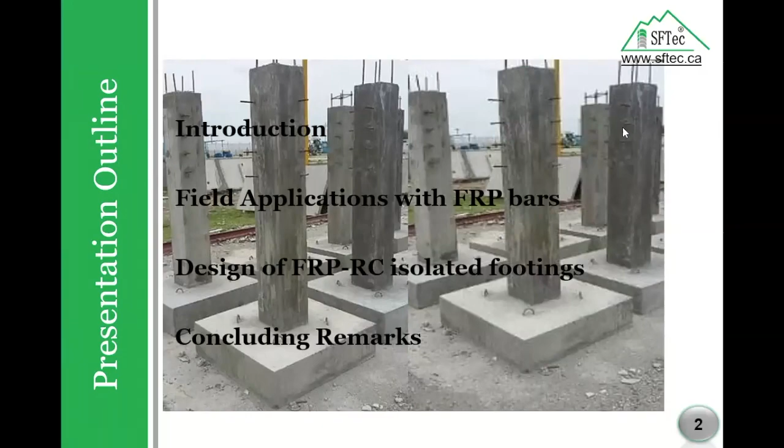Today we are going to talk about design of isolated footing subjected to eccentric loading using fiber reinforced polymer bars. In the next slides, I will go through a brief introduction, field applications with FRP bars, design of FRP-RC isolated footing, and finally, I will give some concluding remarks based on the presented slides.

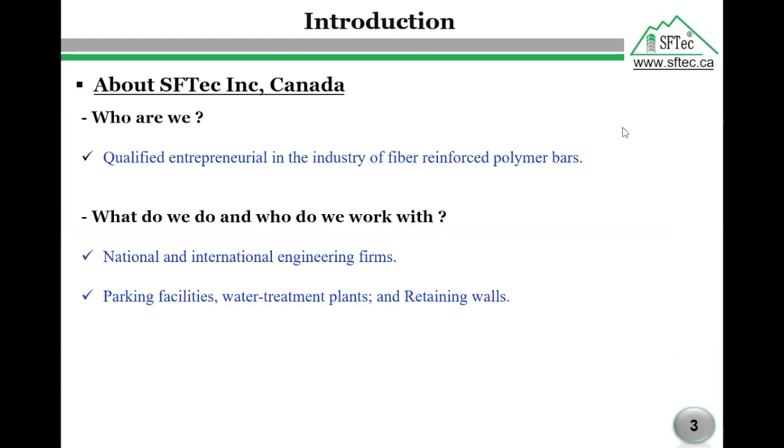In the beginning, I would like to introduce our company, SFTec. Who are we? SFTec is a professional entrepreneurial industry in the business of composite rebar. What do we do and who do we work with? SFTec is working closely with national and international engineering firms and government departments in the construction of parking facilities, water treatment plants, and retaining walls, as well as other structural elements.

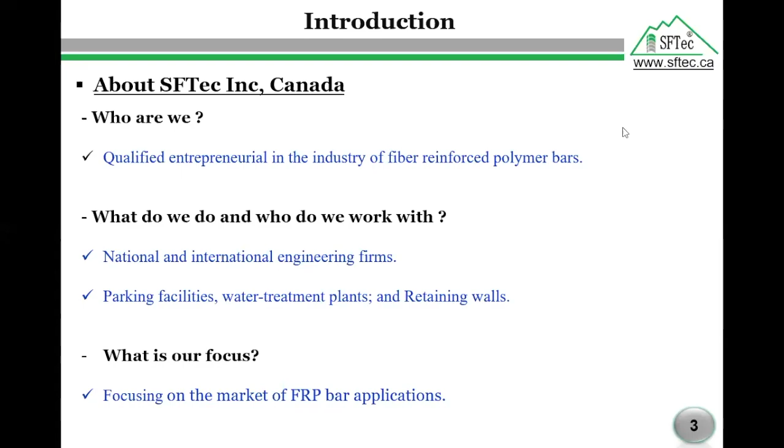What is our focus? SFTec is focusing on the market of FRP rebar application in North America and beyond, through providing a complete design for new structures reinforced with FRP bars, and conducting research and development strategies to ensure continuous improvement of SFTec products. The question now: what is the composition of FRP material?

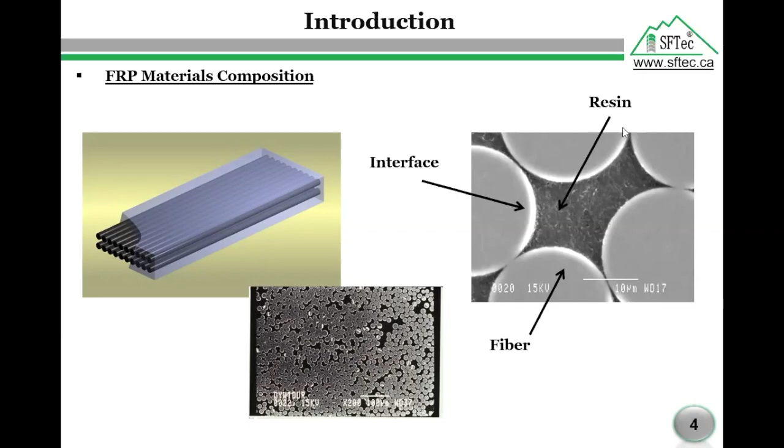As per the microscopic analysis on our right side, we see that the FRP materials consist of fibers, resin, and the interface between fiber and resin. FRP materials may be bars or sheets. We are using the bars as a creative solution to eliminate corrosion steel problems, while the FRP sheets are for strengthening and rehabilitation purposes. In our presentation, we will focus on FRP bars.

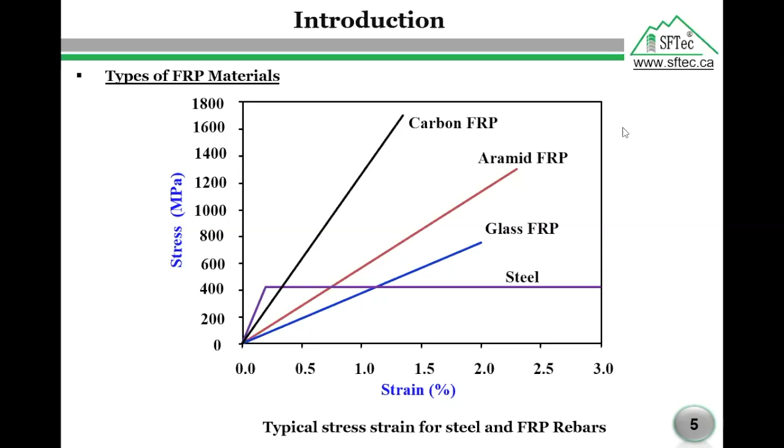SFTec products: in our company, we are mainly focusing on the production of GFRP materials in terms of straight bars, bent bars, closed loops, and spirals. We also have a GFRP material called GFRP connectors for sandwich panels.

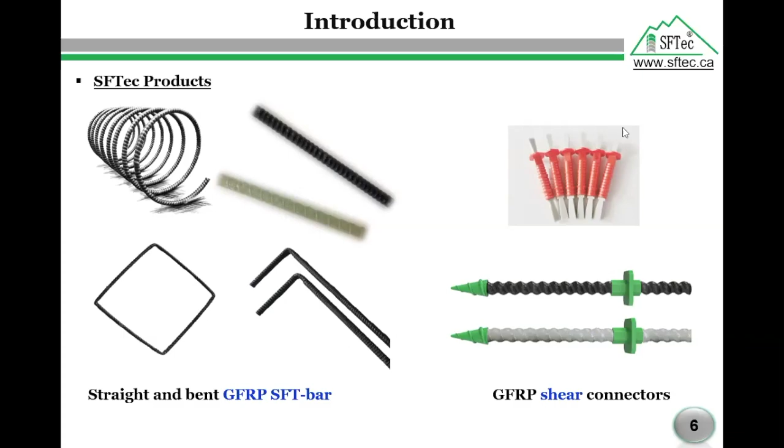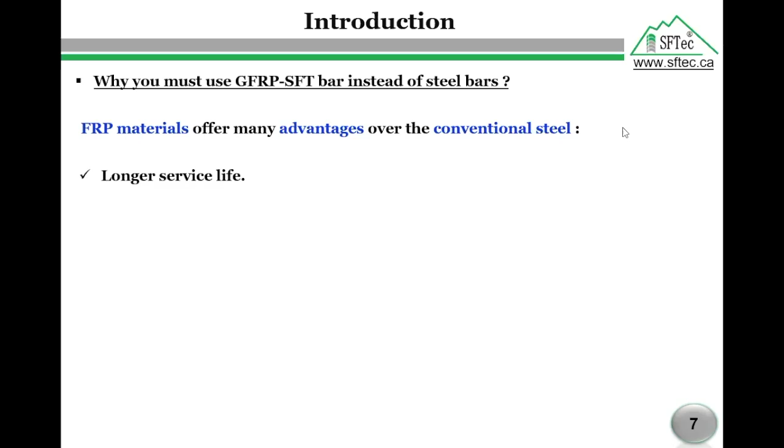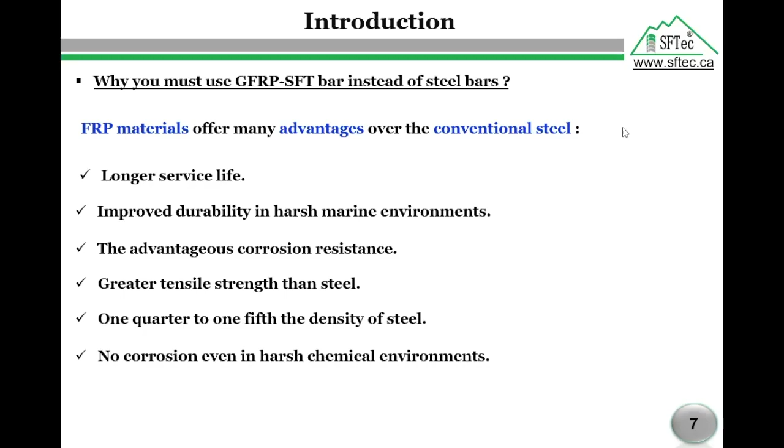Why must you use GFRP bar instead of steel bars? In the last 10 years, FRP bars have been used successfully in hundreds of bridges, parking lots, tanks, and marine structures across Canada and US. FRP materials offer many advantages over conventional steel bars, like longer service life, improved durability in harsh marine environments, the advantage of corrosion resistance, high tensile strength compared to the yield stress of steel, lighter than steel, no corrosion even in harsh chemical environments, and finally, neutrality to electrical and magnetic disturbance.

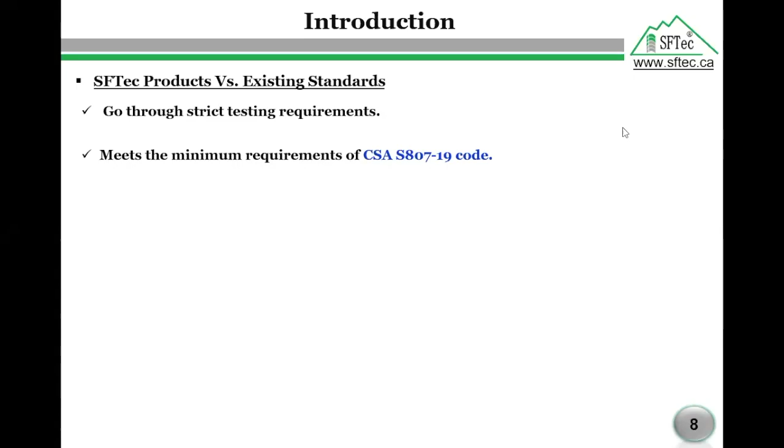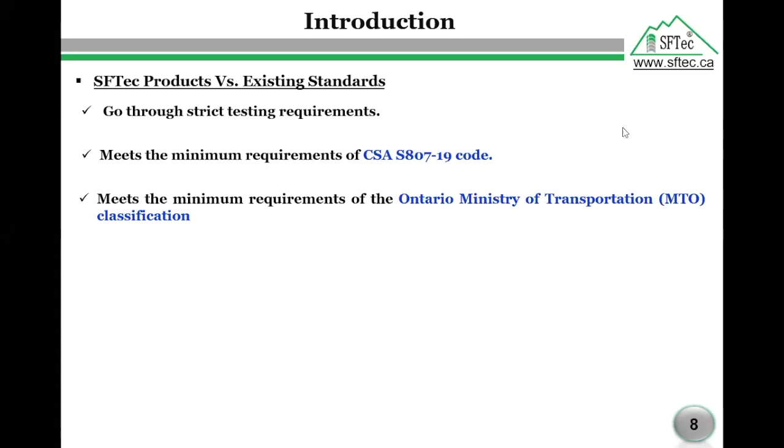SFTec products versus existing standards: our products go through strict testing requirements before they are approved for the market as cost-effective reinforcing materials instead of corrosive steel bars. Our rebar satisfies the minimum requirement of the specification for fiber reinforced polymer code CSA S807 for the year 2019. Also, our rebars meet the minimum requirement of the Ontario Ministry of Transportation classification to be considered for infrastructure works in Ontario province. The FRP testing includes three main categories: physical properties test, mechanical properties test, and durability test.

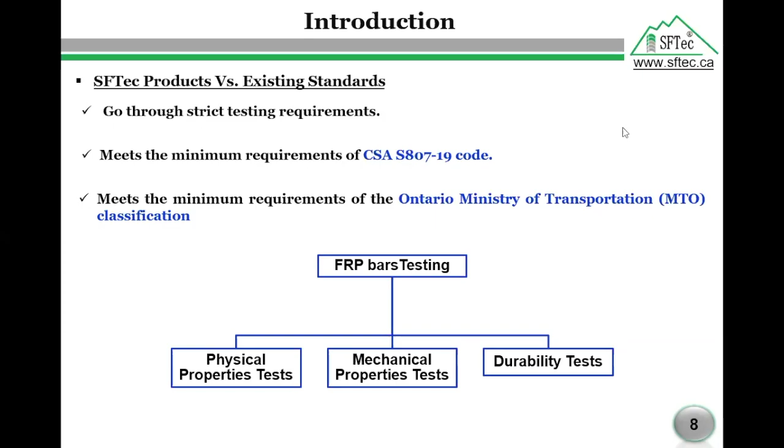As an example, I will give you detailed information on the mechanical requirements of the Canadian standard S807 and MTO versus SFT-bar, for the mechanical properties of GFRP bars of size number 6. Size number 6 here means 20 millimeter.

As we see in the first row, the tensile strength of SFT-bar exceeds the minimum requirement of Canadian standard S807 to the year 2019 and MTO by 60% on average. Also, as we see in the second row, the elastic modulus of SFT-bar exceeds the minimum requirement of CSA S807 and MTO by 8% on average. For other mechanical properties, our rebars also exceeded the minimum requirements of the Canadian standard S807 and MTO.

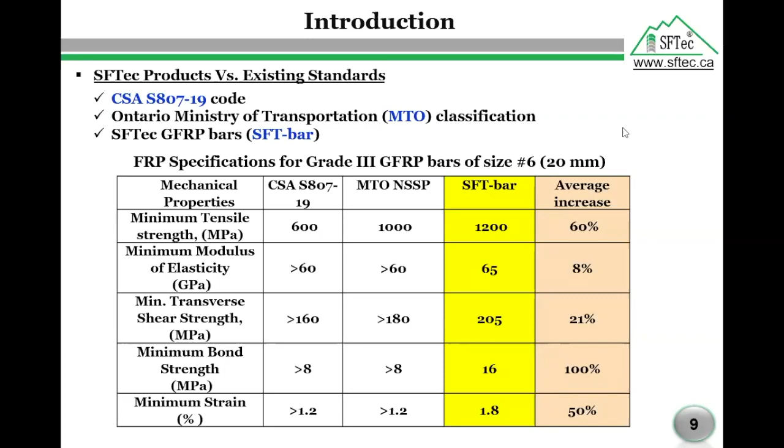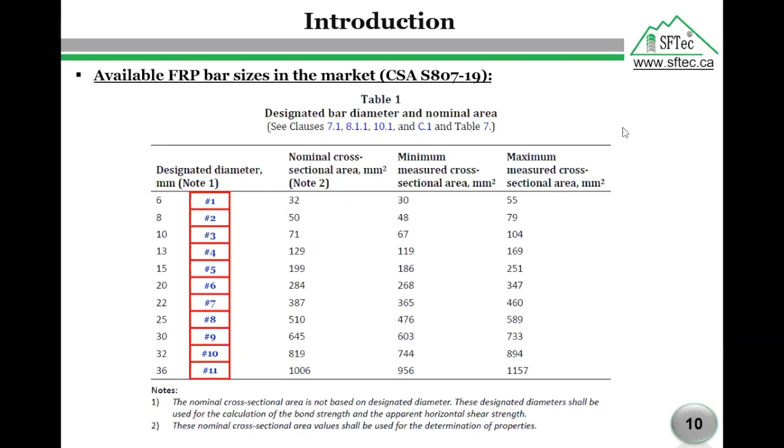Available FRP bars in the market. This table represents the available FRP sizes in the market as per the Canadian standard S807 to the year 2019. As we see, the available bar sizes range from 6 millimeter to 36 millimeter. Sometimes you will hear GFRP bar number 1 - this means a GFRP bar with 6 millimeter diameter, and so on, as shown in this red column.

Now I will talk about foundations. We generally hear about two different expressions related to foundation engineering: footing and foundation. So what is the difference? Foundation is the lower part of the building structure that transfers the building's gravity loads into the earth. Foundations are commonly separated into two categories: shallow foundations and deep foundations. Footing is a foundation that is constructed under the base of a wall or a column.

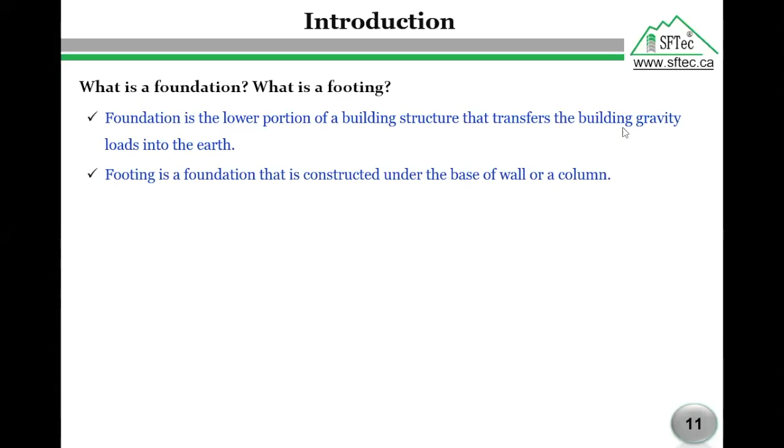The purpose of footing is to distribute the weight of the building over a large area. The term footing is generally used in conjunction with shallow foundations, not deep ones. Footing is placed directly below the lowest part of the structure it supports. What are the types of footing, or types of shallow foundations?

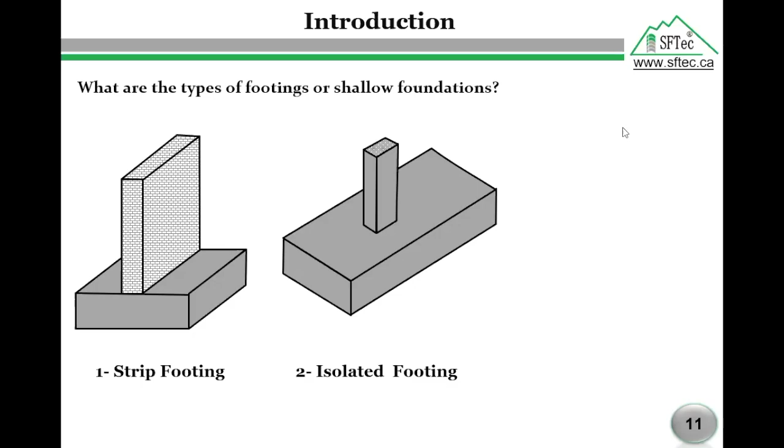Number two, isolated footing. Isolated footings are the most common type of foundation in ordinary structures. They are used to distribute column loads over a relatively large area of soil. As we see in this photo representing isolated footing, the transfer of load here will be in two directions, versus the strip footing where the loading is in one direction only.

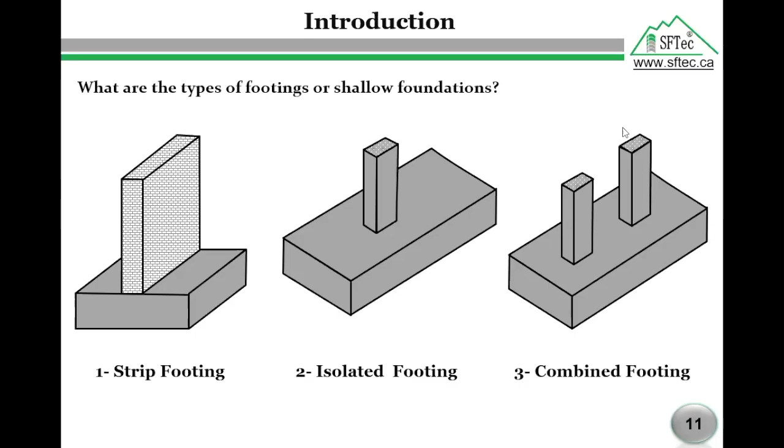The third type is called combined footing. If two columns or more are closely spaced, or the required footing sizes overlap each other, the footings are combined into one big footing called combined footing, as we see on our right side.

The fourth type is called strap footing. If one of the footings is very close to the property line, a stiff beam is used to connect the column to an interior column. This type is called strap footing, as we see here with two isolated footings connected by a beam - this beam is called the strap.

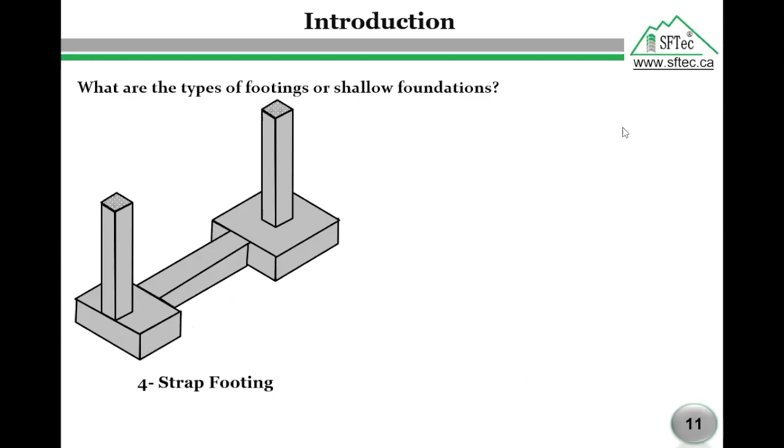The last type we have is called raft footing. If applied loads are heavy, or more than 60% of the isolated footings overlap, a raft foundation is used to support the entire structure, as we see here. This is similar to an inverted flat slab, containing column strips and middle strips.

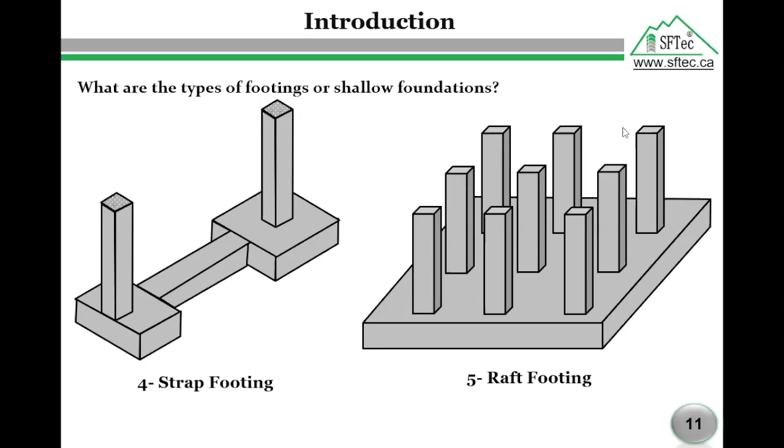Now I will talk about soil pressure under footing subjected to concentric loading. The actual bearing capacity differs significantly according to the type of soil, stiffness of footing, and loading conditions. In general, the distribution under the base of the footing is non-uniform, as shown in this sketch, which represents the distribution of stresses under a footing for sandy soil. Assuming the loading is concentric and the footing is rigid, the soil pressure is very high under one part, like a parabola, and very low on another part.

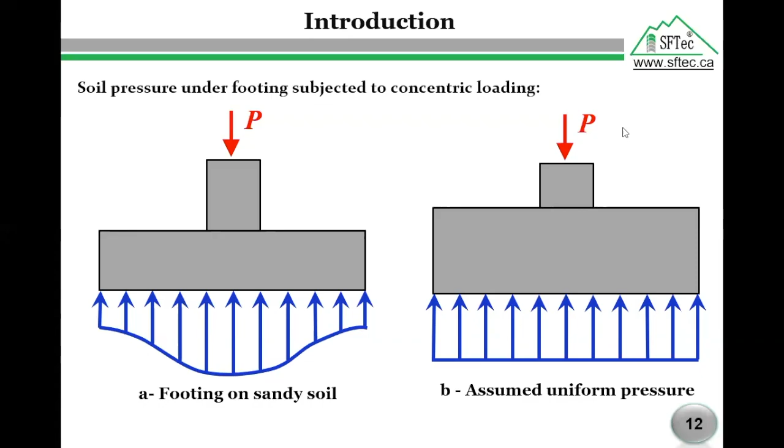However, for design purposes, the bearing soil distribution is assumed to be uniform, regardless of the type of soil or the stiffness of the footing, as shown on the right side. This assumption simplifies the calculation using the actual forces acting on the foundation, and speeds up the design process. So we have a footing subjected to a concentrated load called P. To calculate the area of this footing, we equate the actual stress to the allowable stress.

The allowable stress here is also called bearing capacity. We equate the bearing capacity of the soil to the actual stress on the soil. The actual stress is the column load we have over the footing area. We have the allowable stress from the soil reports and the column load from the analysis, so finally we can calculate the area of the footing.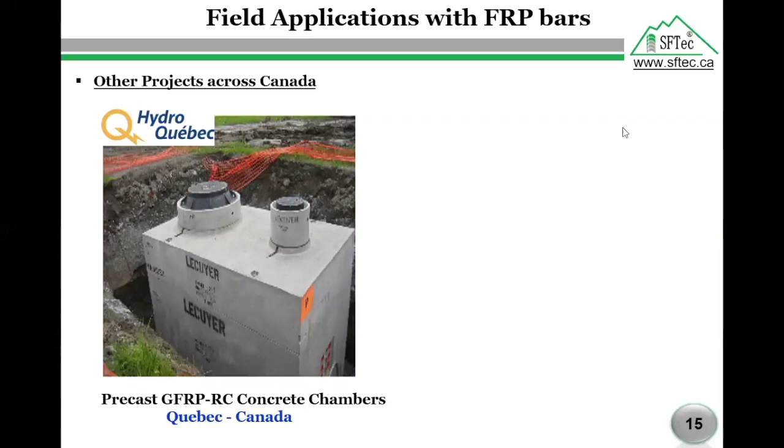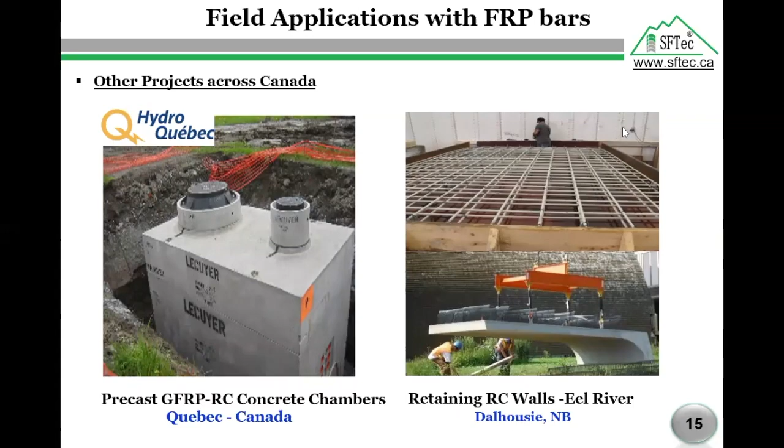Now I will shift to other different applications across Canada. The photo on the left represents a project with Hydro-Quebec for a precast GFRP concrete chamber. On the right, we can see another example of the preparation and installation of retaining RC walls for the Eel River Dalhousie. Another application is reconstructing the deteriorated one-way slabs in the Laurier-Taché parking garage using GFRP bars.

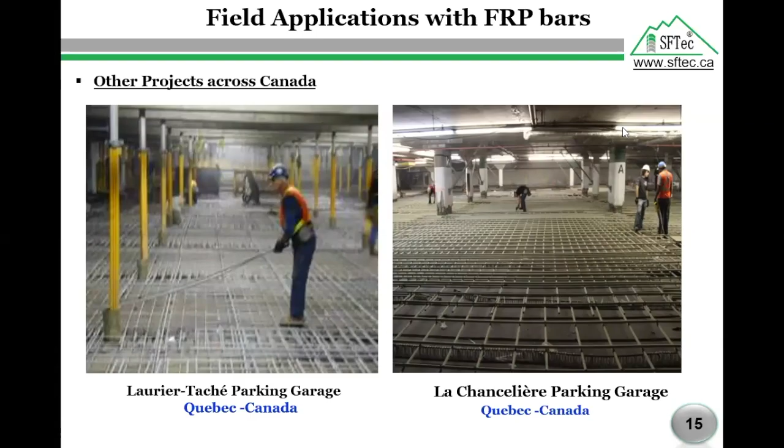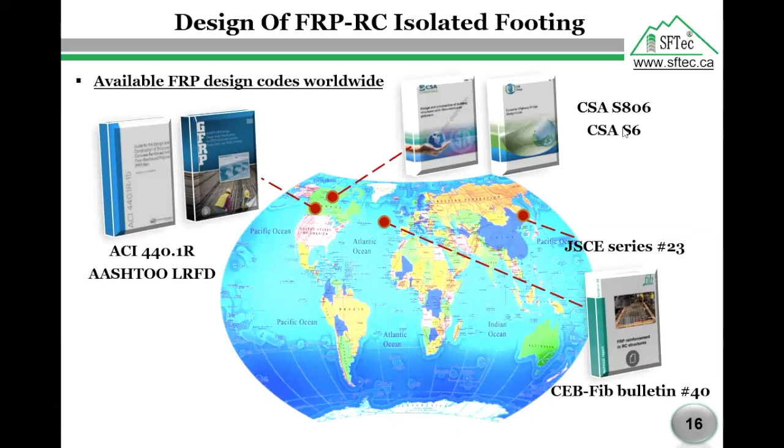The last field application today is the flat plate structure of La Chancelière parking garage in Quebec City. As shown on the right, the flooring slabs of this two-way parking garage are totally reinforced with GFRP bars. It is worth mentioning that several codes and guidelines are available around the world for design of structural elements reinforced with FRP bars - this covers the design philosophy of FRP-RC isolated footing.

Now I will move to the design philosophy for the isolated footing using GFRP bars. I will talk about the flexural and shear design of such footings, according to the Canadian standard S806 for the year 2012.

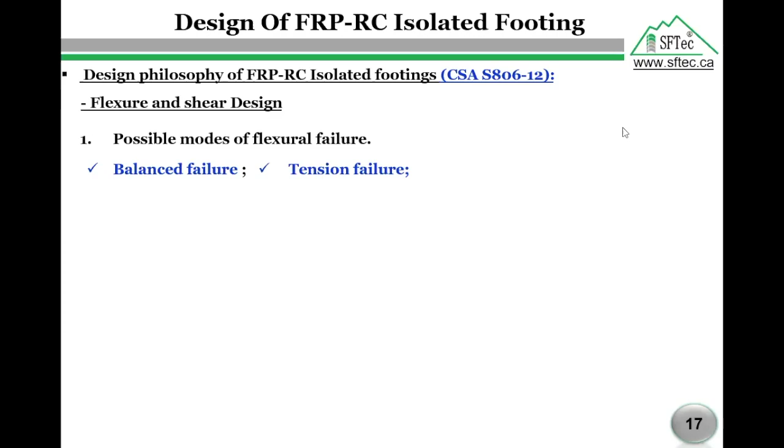We have three possible modes of failure of a concrete section reinforced with FRP bars. The first is balanced failure, representing simultaneous rupture of FRP bars and concrete crushing. The second is tension failure, representing rupture of FRP bars before concrete crushing. The last is compression failure, representing concrete crushing while the FRP bar remains in the elastic range, with a strain level smaller than the ultimate strain.

There is a design difference between steel and FRP, which is that FRP is linear up to failure and exhibits no ductility or yielding. Another major difference is that serviceability will be more of a design limitation in FRP reinforced members than with steel, due to lower modulus of elasticity - deflection and crack widths will govern the design.

Load factors and load combinations: according to the Canadian standard S806, the code uses the same load factors as in the Canadian standard A23.3 for the year 2014. Load combinations are also the same as in the Canadian standard A23.3 for the year 2014, which are based on the National Building Code of Canada.

Material resistance factor: concrete and steel resistance factors remain the same as in the Canadian standard A23.3 for the year 2014, while the FRP resistance factor equals 0.75 for all FRP structures, reinforced or pre-stressed.

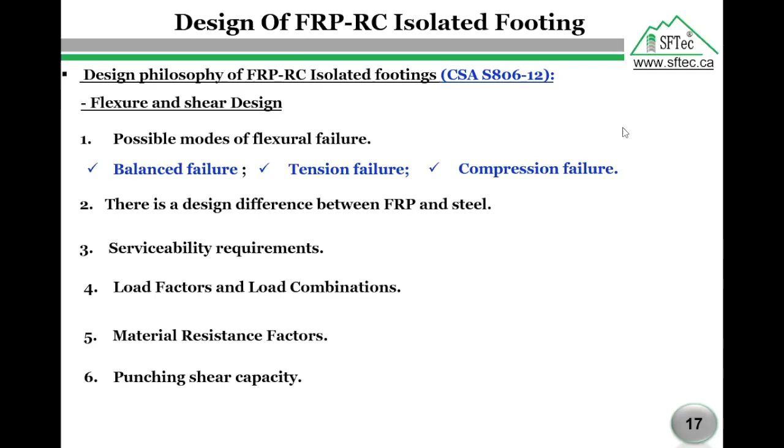The thickness of the isolated footing is commonly governed by the two-way punching shear. So the isolated footing should be checked against the two-way punching shear by comparing the actual shear stress from the acting load on the footing with the allowable punching shear stress using the available code equations.

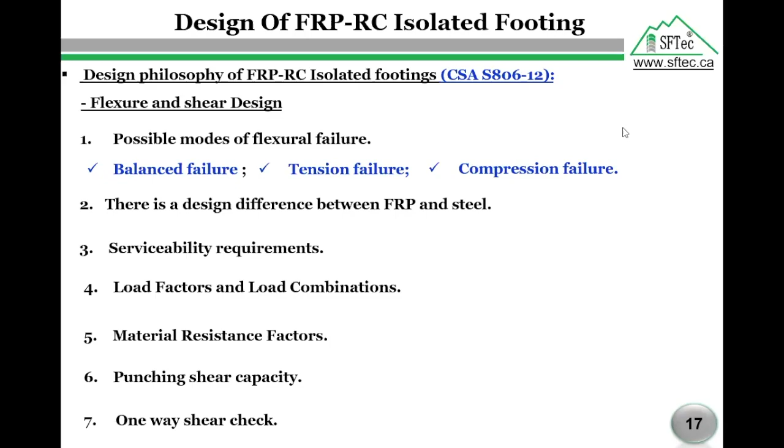The check of one-way shear is to be performed, even though it is infrequently critical.

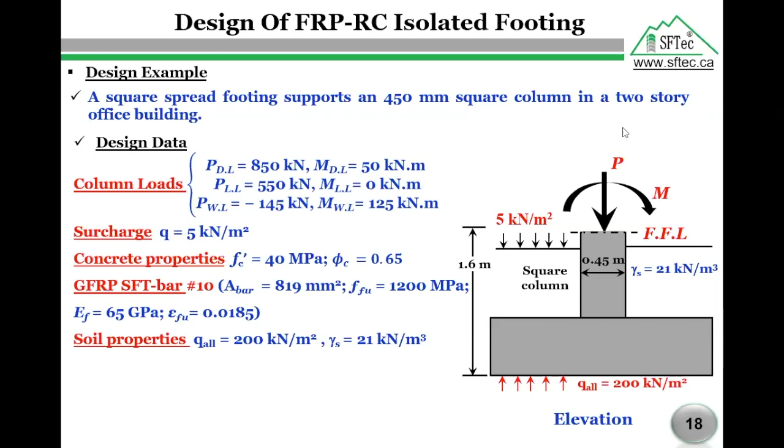GFRP sand-coated bar number 10 is chosen as a flexural reinforcing bar for the footing. The allowable bearing capacity and soil density are 200 kilonewton per meter square and 21 kilonewton per meter cube respectively.

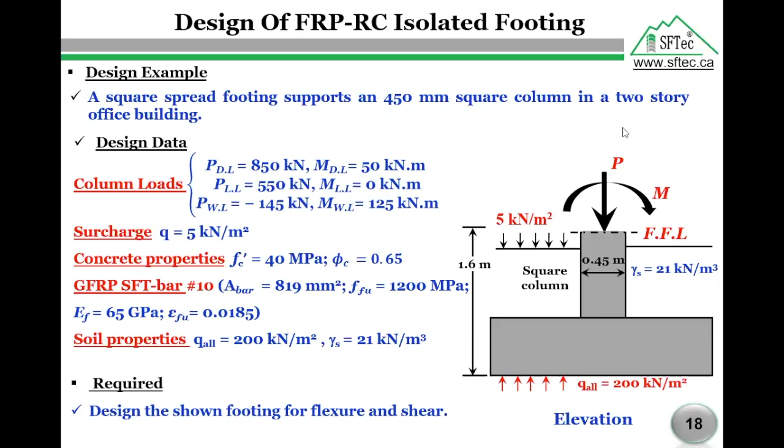In the next slides, we will apply all the mentioned points in the design philosophy of this footing for shear and flexure, in order to have a detailed flexural and shear design for an isolated footing, including serviceability limit state check, as well as one-way and two-way shear check. These following design steps will be performed in the next slides.

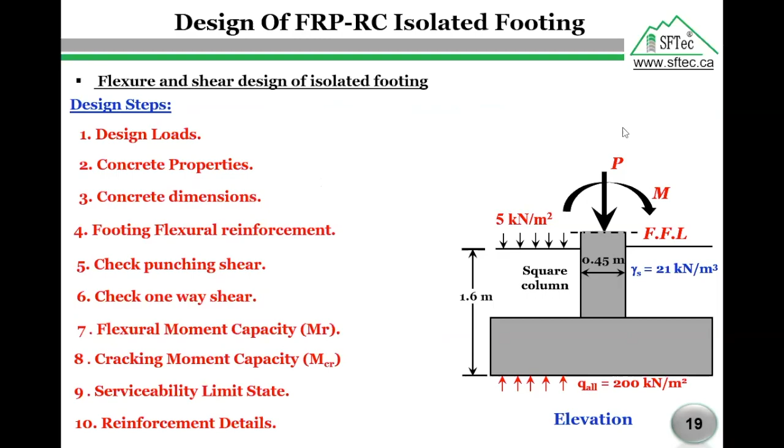The first step here is to calculate different load combinations in terms of service load and ultimate load. As I mentioned earlier, we have P dead load, P live load, P wind load, and the alternative moment for the dead load, live load, and wind load.

What we are going to do now is calculate the service loads. The first service load combination is dead load, so we will put under the axial load 850 kilonewton and the moment 50 kilonewton.

The second service load combination is dead load plus live load. So we add 850 to 550, giving dead load plus live load equal to 1,400. And M dead load equals 50, M live load equals 0, so finally we will have 50.

The last one is dead load, live load, and wind load. By using the same criteria, we will calculate the axial load and the moment. This last load combination for service load will govern the design, so we are going to take this one in our calculations.

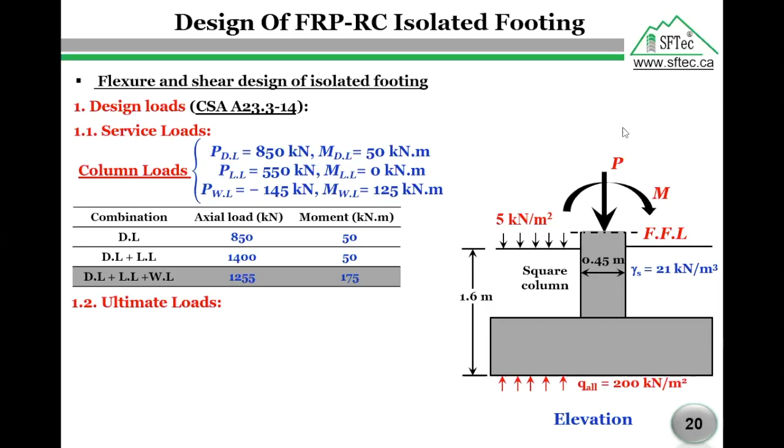After calculating the service loads, the next step is to calculate the ultimate loads as per the National Building Code of Canada and the Canadian Standard CSA A23.3, 2014 edition.

According to these codes, we have 5 loading combinations that may be considered for design of our footing under dead load, live load, and wind load. Each load combination should be investigated separately. However, load combination number 3 will govern the design, so we are going to include the load combination due to ultimate loads number 3 in our calculations for the design of flexure and shear.

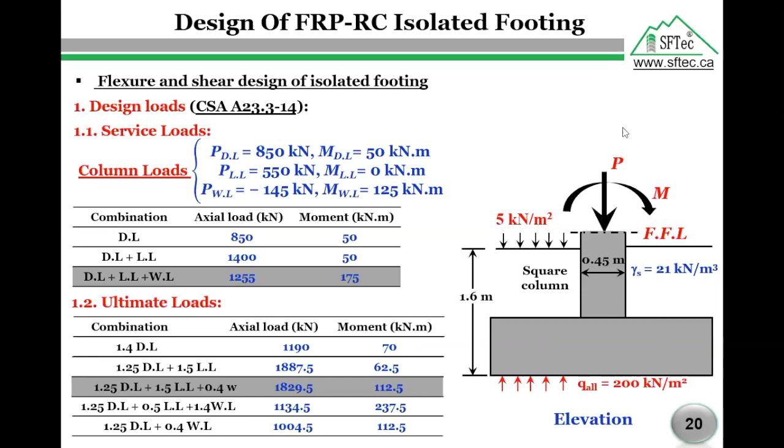The next step is to calculate the concrete properties. As given, the concrete compressive strength equals 40 MPa, so the elastic modulus according to the Canadian standard equals 4,500 times the square root of the concrete compressive strength. The stress block parameters alpha 1 and beta 1 can be calculated using these two equations as a function of the concrete compressive strength, so alpha 1 and beta 1 equal 0.79 and 0.87 respectively.

Step number 3 is to calculate the concrete dimensions in terms of footing area and depth. Let us start with the footing area. The chosen service load combination will be used to calculate the concrete dimensions.

The first thing I'm going to calculate is something called Q net. Q net will be the Q allowable minus the weight of the soil on the footing as well as the surcharge. So Q net will be 200, the Q allowable, minus the weight of the soil, gamma S, times the soil depth, plus the surcharge. Finally, Q net will equal 161.4 kilonewton per meter square.

We are going to use the equations explained before in order to estimate the footing area. We here have a square column, so it is preferable to have a square footing. So I'm going to use this equation for a square footing.

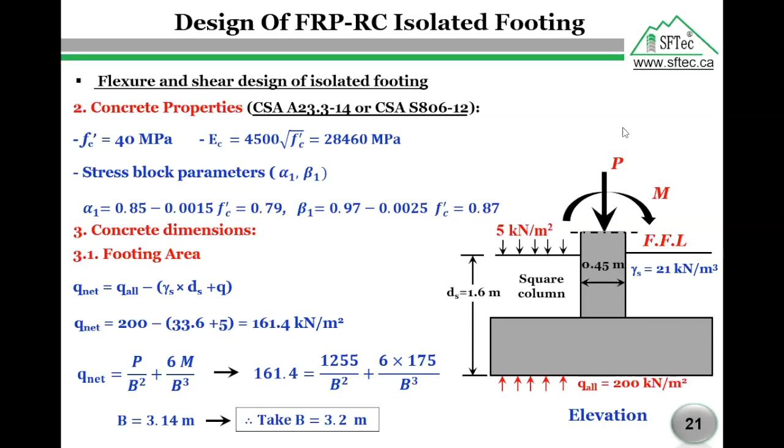So by substituting for the Q net 161.4 and the loads from the service load case, P and M, we can get B. B here equals 3.14 meters. By approximating the length of the footing B to the nearest 100 millimeters, we will take B equals 3.2.

The next thing we will go to is check the normal stresses under the soil. Now we have the footing area and the loads from the service load case, so we will check the maximum and minimum stresses under the footing. The maximum stress under the footing should be less than or equal to the net bearing capacity. The minimum stress under the footing should be greater than 0, because we don't need to have tension on the soil.

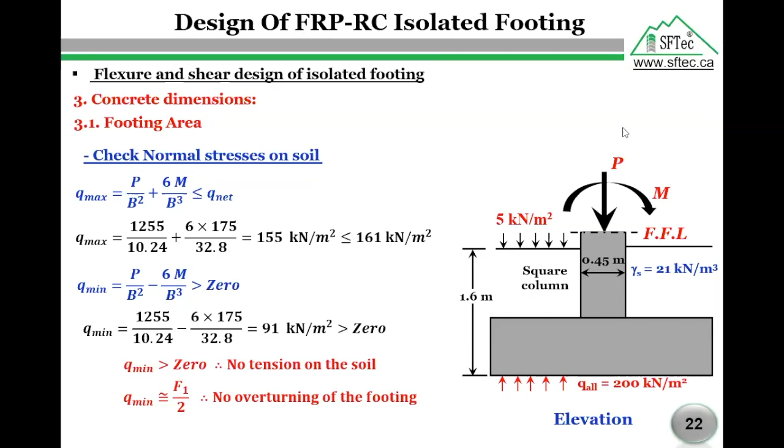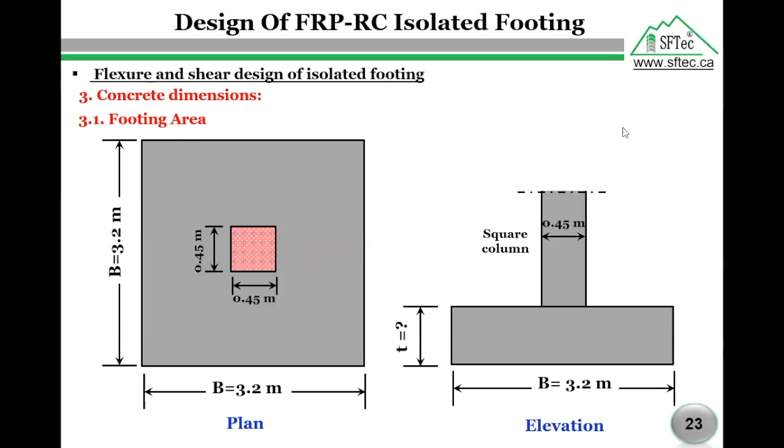Another check we need to do is to have Q minimum approximately equal to half the Q maximum value, in order to avoid any overturning on this footing. So finally, we have a footing area 3.2 by 3.2 for a square column 0.45 by 0.45.

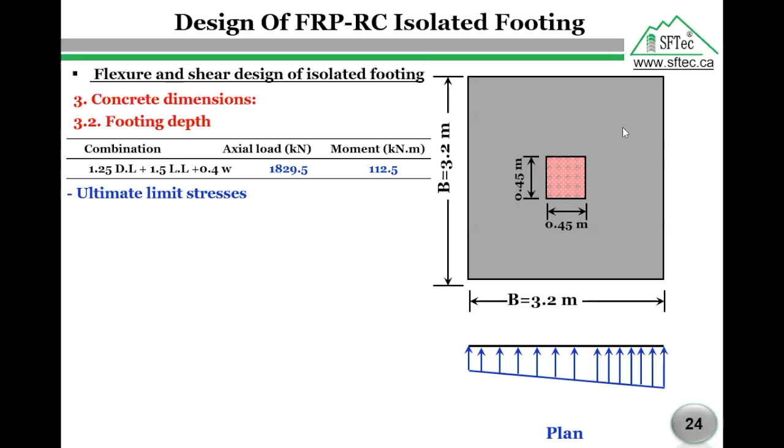Now we will calculate the footing depth. For calculating the footing depth, we will use the load combination from the ultimate loads we get. We have here ultimate axial load 1829.5, and ultimate moment equals 112.5. The next step is to use these loads to calculate the ultimate stresses under the footing.

The maximum factored moment: as shown in our plan, we have two sections to be considered in order to calculate the maximum factored moment on our footing, section I and section II. These two sections are located on the face of the column. We have here a square footing.

By experience and also by calculations, the moments for section I and section II will be closely the same. So what I'm going to do is calculate the moment from section I, which is a little bit higher than the moment from section II.

So here section I is located at 1.375 meters from the column face. We calculated this by subtracting 3.2 from 0.45 over 2. So here the dimension X equals 1.375.

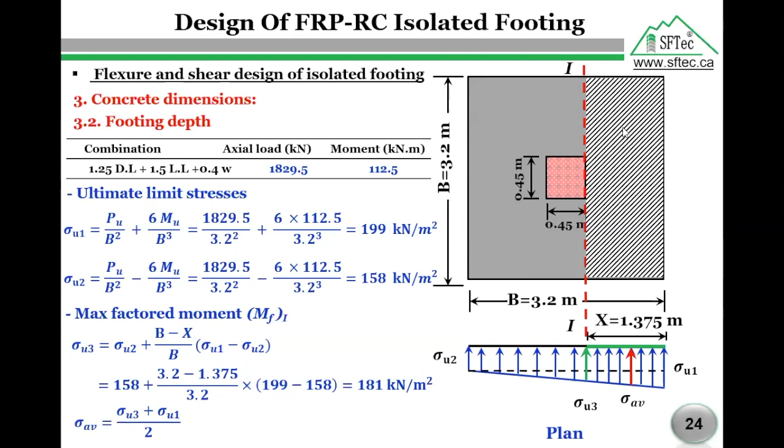Sigma ultimate 3 will be calculated using triangle similarities, and sigma ultimate 3 will equal 181 kilonewton per meter square. Now we have the stress on this face and the stress on the other face. In order to deal with this area, we are going to calculate the average stress under this area, which will be 190 kilonewton per meter square.

Again, we calculated sigma ultimate 3 at the face of the column, and sigma average, which is sigma ultimate 3 plus sigma ultimate 1, gives sigma average of 190 kilonewton per meter square. By using the average stress, I can calculate the force on this area. The force will be sigma average times the area, where the area equals B times X. So finally, we have F equals 836 kilonewton.

So I have here the force at the centroid of this area. What I'm going to do now is calculate the moment, which will simply equal F times X over 2. So finally, we have MF for section I equals 575 kilonewton per the entire width B. Now we calculated the maximum factored moment on the critical section.

What I'm going to do now is calculate the flexural depth. We use this equation to calculate the flexural depth, which equals 680 millimeters. This equation is basically not Canadian standard. Really, as usual, what you are going to do is assume a reasonable value for the depth, and after that you can check it. But to make it easy for you, I'm offering this equation to calculate an approximate value for the flexural depth, which is near the actual value you should have.

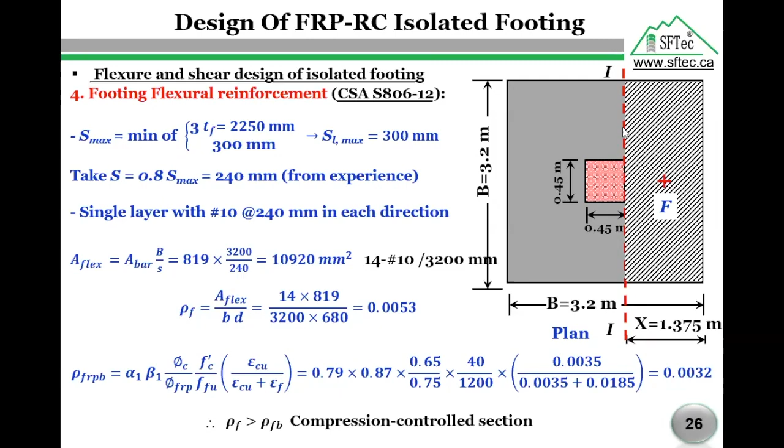After calculating the flexural depth, we need to check the punching shear capacity of the footing. In order to do so, we need to calculate some properties for the critical section.

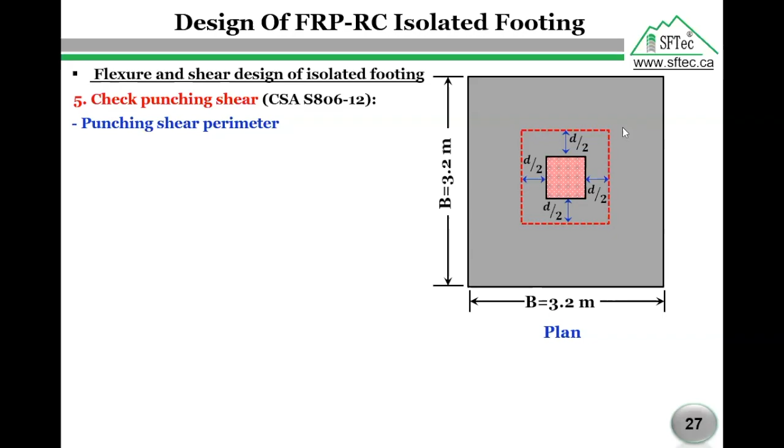The critical section, as we see here on our right side, is located at d/2 from each face of the column. So the critical shear section dimensions will be B1 and B2. B1 equals C plus D, and B2 also equals C plus D. So B1 equals B2, and finally we have 1130 millimeters.

The punching shear perimeter will be the summation of these four sides. So we have 2B1 and 2B2. Finally, we have B at 0.5D equal to 4,520 millimeters.

Now we need to find the tributary area. That is like the force pushing down, and it is going to separate the critical shear area around the column from the rest of the footing.

We have to subtract the punching shear area from the footing area in order to get the tributary area. So the shaded area we have here is called the tributary area. How are we going to calculate it? We subtract the area of the footing minus the punching shear area, so finally we have tributary area equal to 8.96 meters squared.

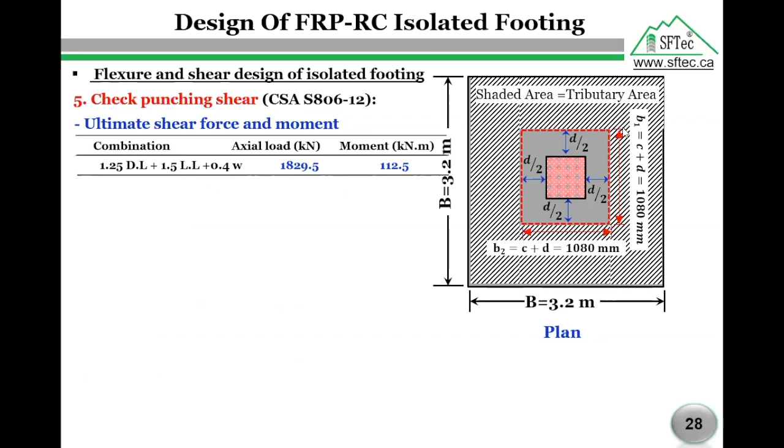Since none of the load combinations we have generates uplift, it can be concluded that the shear on the boundary of the concrete of the punching shear area is proportional to the tributary area.

So V will equal P ultimate times the tributary area divided by the area of the footing. So V ultimate will equal 1,601.

Moment on the boundary of the critical section is proportional to the ratio of the moment of inertia to the total area. So we have here M ultimate equals 111 kilonewton meter. The portion of this moment is transferred by eccentricity of shear.

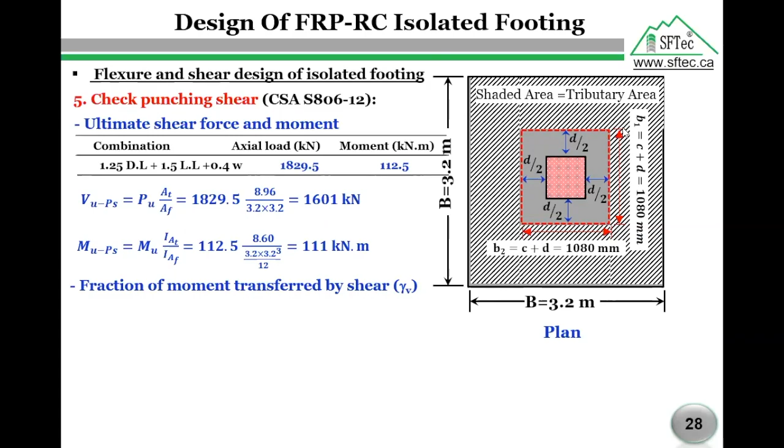So we need to calculate the fraction of moment transferred by shear. This one is called gamma V. Gamma V can be calculated using this equation. So we are going to consider only 0.4 from the ultimate moment to be transferred by shear.

The ultimate punching shear stress due to moment and axial load can be calculated using the eccentric shear model as per the Canadian standard A23.3 to the year 2014. So finally we will have VF equals 0.56 MPa.

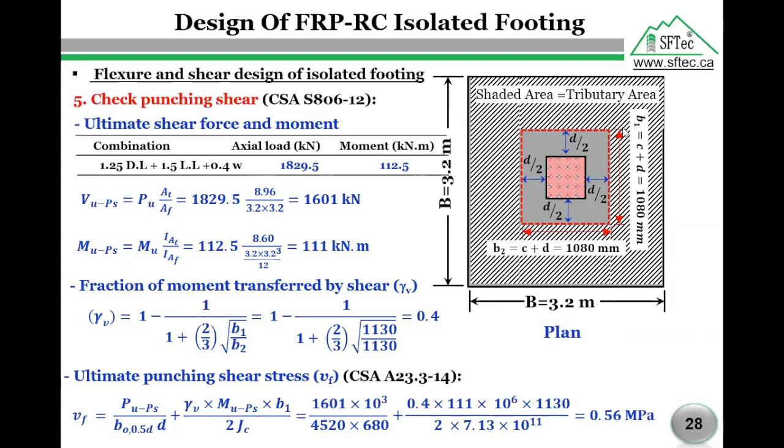The ultimate factored shear stress is known for us. The next step is to compare it with the allowable punching shear stress to check if it is safe or not. The punching shear strength will be the least value from these three equations.

In these equations, we have new terms that should be determined. Alpha S, based on the column location. We have here an interior column, so alpha S will equal 4. Beta C, which is the ratio between the longer to the shorter sides of the column, is equal 1.

The elastic modulus of the used bar equals 65 GPa. The flexural reinforcement ratio equals 0.53%. The factor lambda is based on the concrete type. We have here normal concrete type, so lambda will equal 1.

The concrete resistance factor equals 0.65. The concrete compressive strength equals 40 MPa. And the calculated depth of the footing equals 680 millimeters.

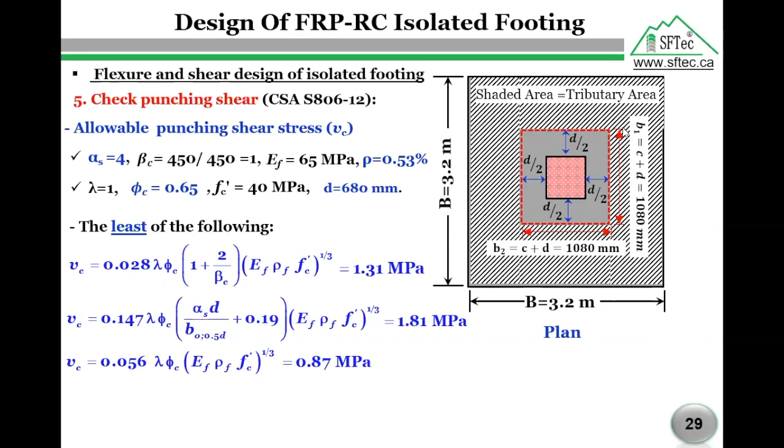Using these numerical values in this equation, we will have 3 different values for the allowable punching shear stress, ranging between 0.87 to 1.81 MPa. We are going to select the minimum value, which is 0.87 MPa.

By comparing the allowable stress with the actual stress we calculated, our footing is safe and there is no need for transverse shear reinforcement.

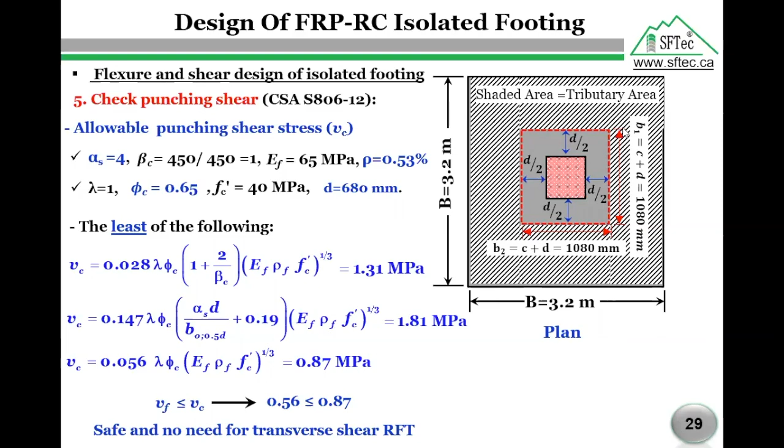So now I'm going to check this footing for one-way shear. The critical shear section for one-way shear is located at a distance called dV. dV, according to the Canadian standard S806 to the year 2012, equals the maximum of 0.9d and 0.72h.

So 0.9D equals 0.9 by 680, or 0.72h equals 0.72 by 750. We are going to select the maximum value. The maximum value here equals 612. So the critical shear section is located at 612 millimeters from the column face.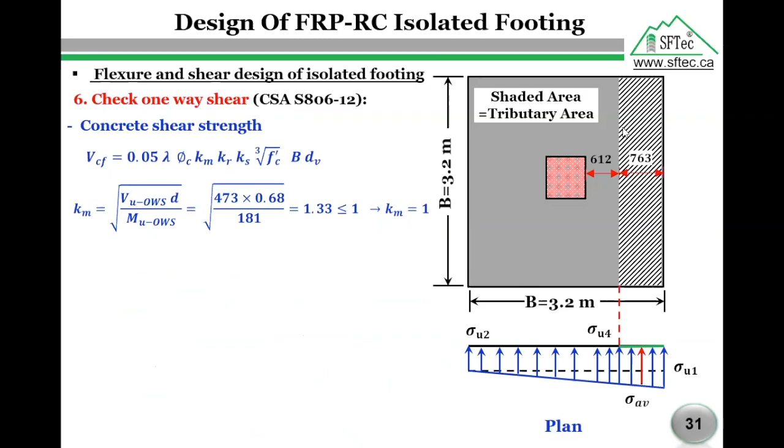The one-way shear strength can be calculated using this equation according to the Canadian standard S806. In this equation, we have some important factors affecting the one-way shear. The first term is called Km, a coefficient taking into account the effect of moment at the section on shear strength. Kr is a coefficient taking into account the effect of reinforcement rigidity on shear strength.

And finally, we have Ks, which takes into account the effect of member size on shear strength. Finally, one-way shear strength equals 1,149 kilonewton. By comparing both the allowable and the ultimate one-way shear strength, our design is safe. So this footing is safe for one-way shear.

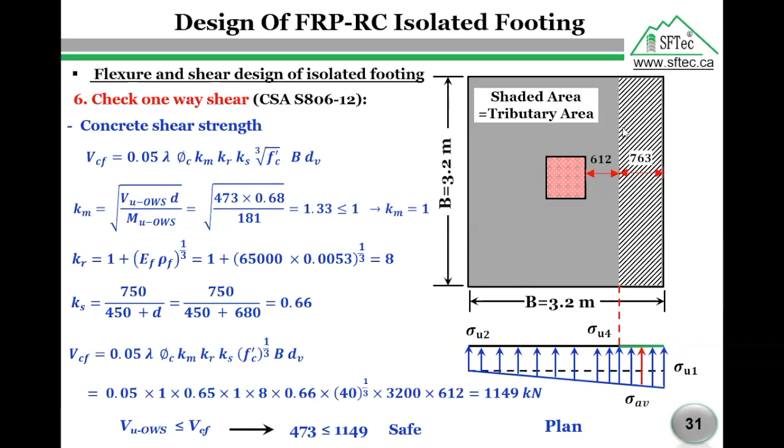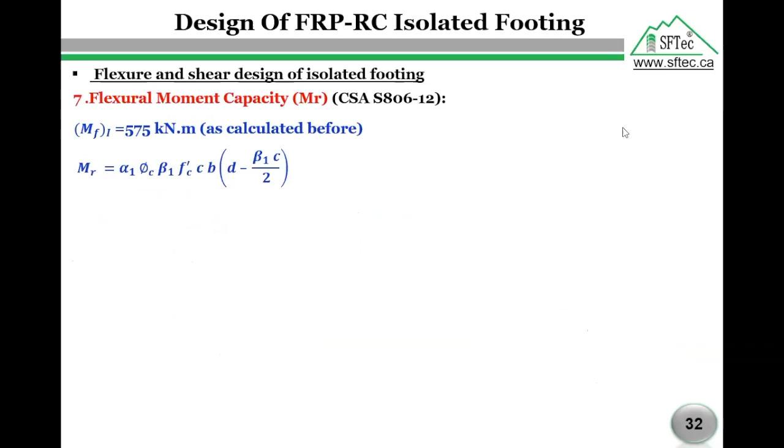In step number 7, we will calculate the footing flexural moment capacity as per the Canadian standard S806 to the year 2012, using this equation. All variables in these equations are known or calculated before, except the neutral axis depth. So here we have alpha 1, beta 1, gamma C, phi C, FC, B, and the flexural depth. So the unknown variable for us now is the neutral axis depth.

From equilibrium, we can get the neutral axis depth by equating the compression force with the tension force. So the neutral axis depth equals 136.4 millimeters.

Before going to calculate the flexural moment capacity, we need to check the neutral axis depth to the flexural depth of the footing. The neutral axis depth to the flexural depth of the footing shall be greater than this term.

By dividing 136.4 over 680, it will equal 0.2. So this term is greater than 7 over 7 plus 2000 multiplied by the ultimate strain in the used bar.

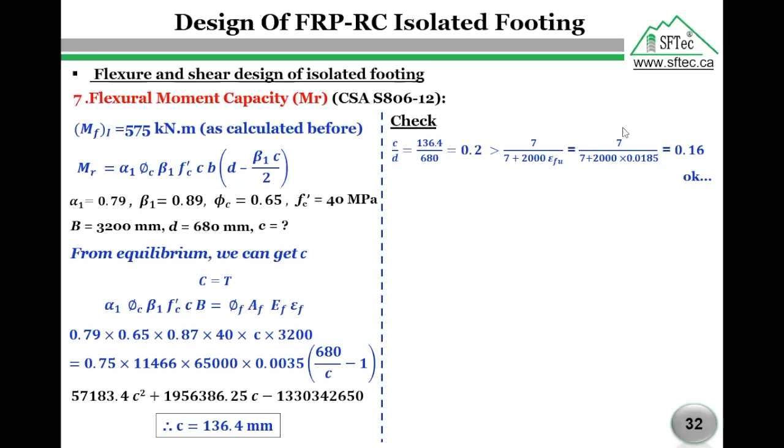Now we can calculate the flexural moment capacity of the designed footing. The flexural moment capacity of the designed footing equals 4,729 kilonewton meter. By comparing the footing flexural moment capacity and the maximum factored moment, the footing flexural moment is greater than the maximum factored moment.

The footing cracking moment can be calculated using this equation. By comparing the footing cracking moment capacity and the footing flexural moment capacity, the footing moment capacity exceeds 1.5 times the footing cracking moment capacity.

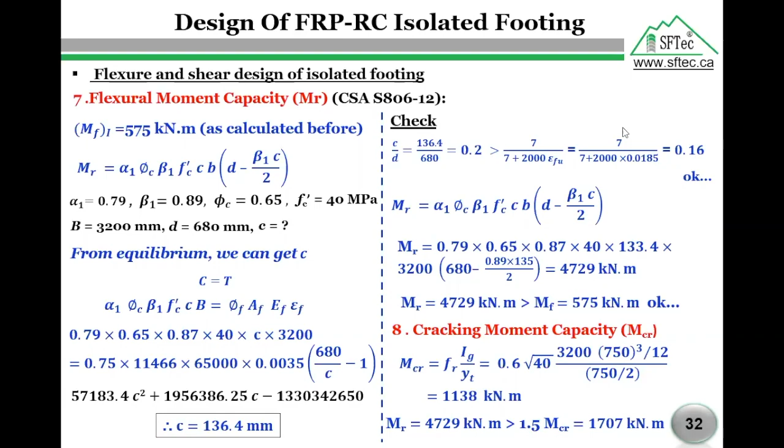Now we will shift to the serviceability limit state check. As we agreed, in order to have a successful design for any structural member with FRP bars, we should check the serviceability limit state because the design is mainly controlled by crack widths and deflection.

In order to do so, we have two checks. The first one is the stress and strain limitation. Let us go with this one.

The ultimate stress in the used bar under service load should be calculated using this equation. The Canadian standard S806 allows using 25% of the ultimate strength of the used FRP bar. So the maximum stress in the FRP bars under full service load should be less than or equal to 0.25 of the ultimate strength of the used bar.

First, we should calculate the maximum moment in the footing under service load in order to calculate the stress in the used bar at service load level. The maximum moment in the footing due to service load will be calculated using the same criteria as we did with the maximum factored moment.

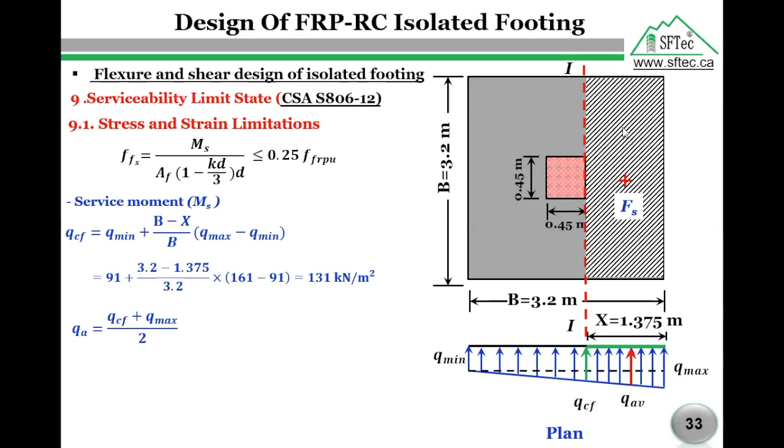Now we are going to calculate the average stress under this area. The average stress equals 146 kilonewton per meter square.

Now we can calculate the force at the center of this area. The force equals 642.4 kilonewton. Finally, the moment under service load will equal 442 kilonewton meter per the entire length of the footing.

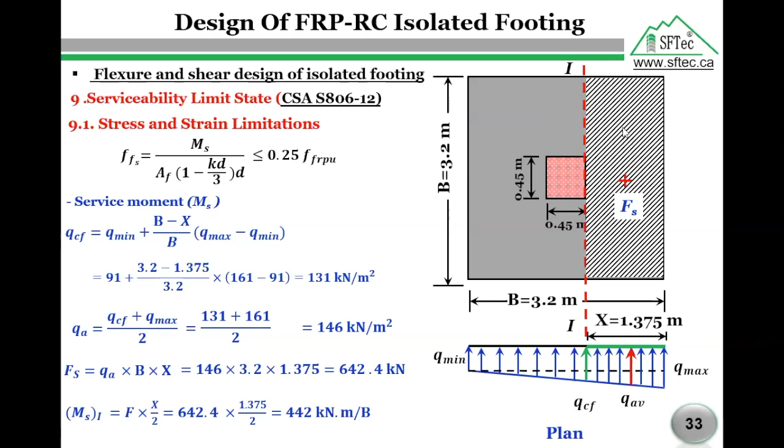The modular ratio is the ratio between the elastic modulus of the used bar to the elastic modulus of the concrete. So rho F by Nf will be 0.012. Finally, K equals 0.14.

And the stress under full service load is 60 MPa. By comparing 60 MPa with 25% of the ultimate strength of our bar, we will have a safe design.

The stress in the bar now under service load is known for us. The elastic modulus is known from the design data. So now we can calculate the ultimate strain under full service load. The ultimate strain under full service load equals 0.00092. This is less than 0.0015.

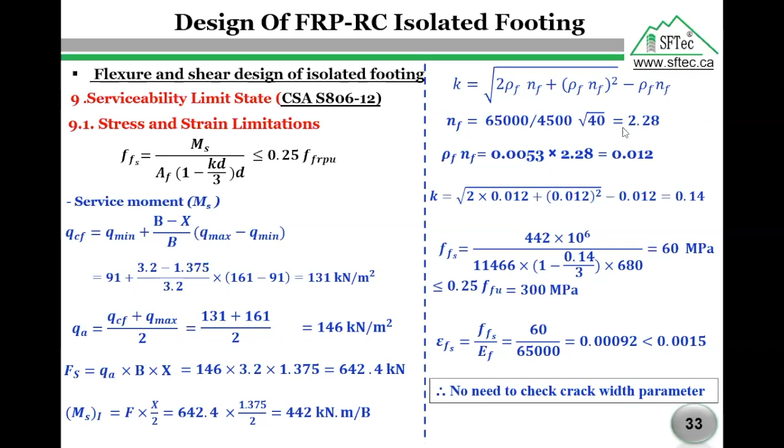So there is no need to check the crack width parameter, which is the second check needed for the serviceability limit state according to the Canadian standard S806. Finally, we have here the reinforcement details for the isolated footing we designed.

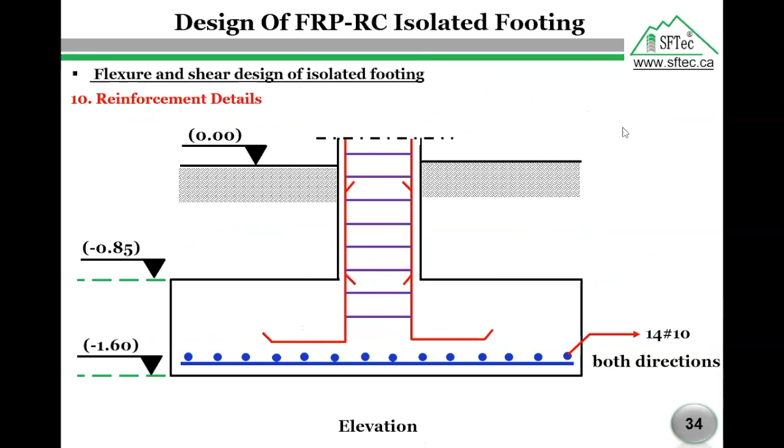As per our design, we will use 14 number 10 bars in both directions.

Based on the presented slides, I'm going to give these concluding remarks.

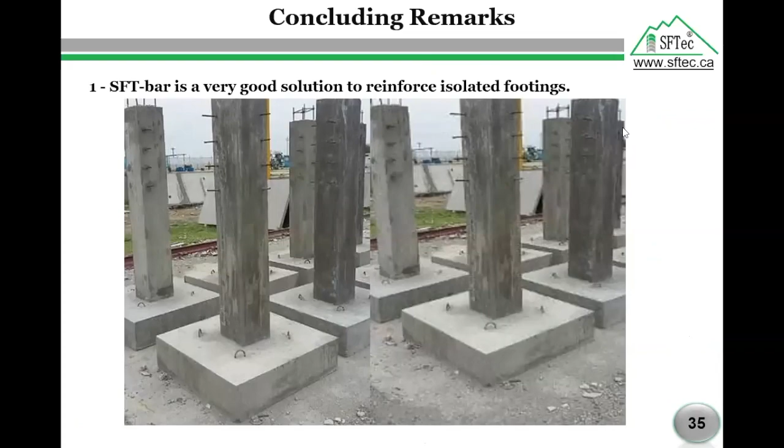Number one, FRP bar is a very good solution to reinforce concrete infrastructures located in harsh environments. FRP rebars have been used successfully in hundreds of bridges, parking garages, pavements, piles, foundations, and other structures across Canada and the US.

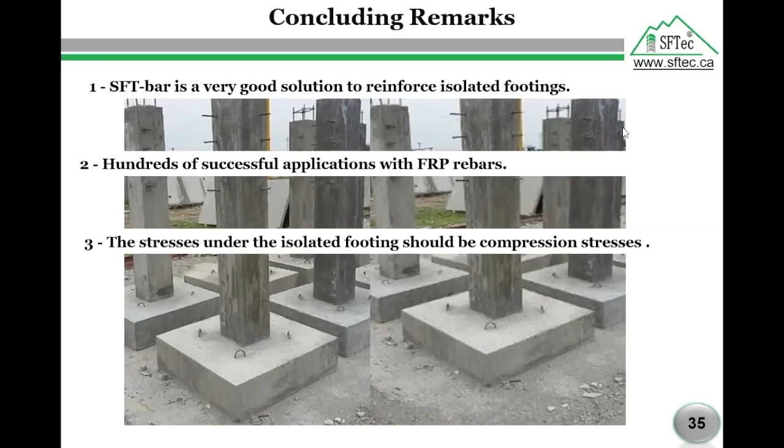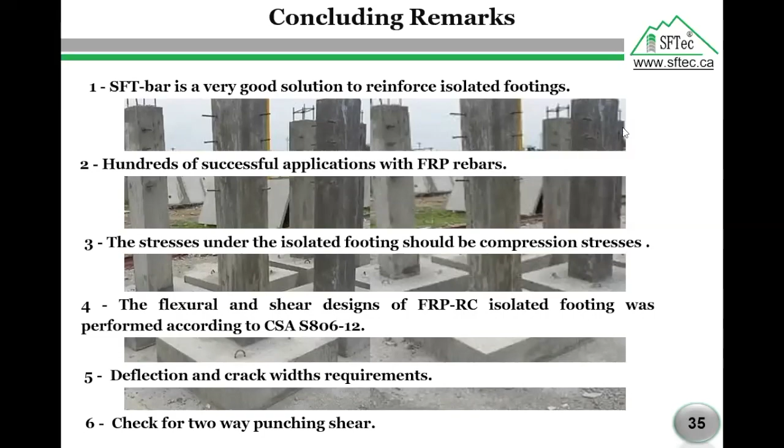The stresses under the isolated footing should be compression stresses in order to avoid overturning of the footing. The isolated footing must comply with the flexural and shear provisions according to the Canadian standard S806-12. Due to the lower modulus of elasticity of FRP bars, deflection and crack widths will govern the design of such footing. The thickness of the isolated footing is commonly governed by the two-way punching shear check.